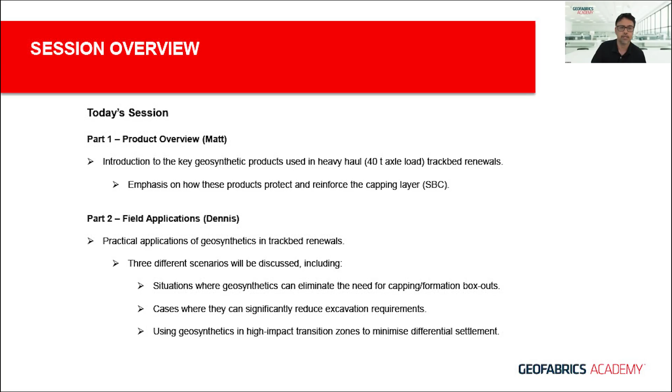I'm going to briefly go over the key geosynthetic products that we typically use in the trackbed in heavy haul rail, with an emphasis on how these products protect the subballast capping layer, which plays an important role in the overall trackbed performance. I'll go over the products individually, and then part two will be Dennis, who will talk more about field applications, going over three different scenarios that rail operators and consultant engineers may encounter: situations where geosynthetics can eliminate the need for capping or box outs altogether, cases where they can significantly reduce excavation requirements particularly over soft soils, and using geosynthetics in high impact transition zones such as bridge approaches, turnouts, and over culverts. So the first part is very much product focused, and then we're going to switch to actual applications and how they're applied in the field.

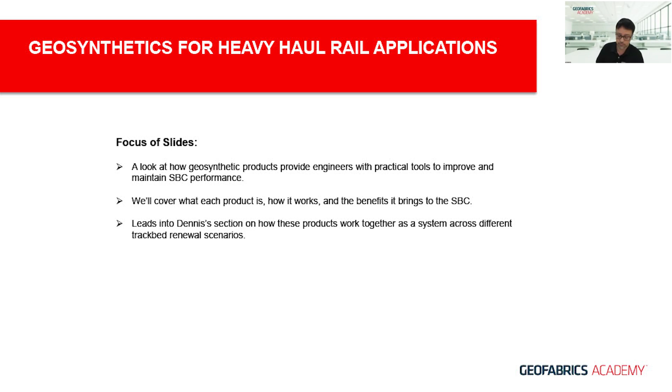As I mentioned, I'll be going over key products and their benefits, and I'll get started on that. The focus of my slides is to look at how geosynthetics provide engineers with practical tools to improve and maintain the subballast capping layer. We look at these individual products as tools in a toolkit, and we'll discuss their benefits, and later on where they can be applied in the trackbed. My section will lead into Dennis's section on how these products actually work together as more of a system, which we usually see them in the field.

So the four products I'm going to cover today are used in the trackbed: large aperture multi-axial geogrids, typically installed at the ballast and capping interface, which function for ballast stabilization. Then we'll talk about Tracktex, also installed at the ballast capping interface underneath the geogrid, which functions to provide capping protection and moisture control. Further down the trackbed, we'll consider OmniWeb, a type of geocell, used in the subballast capping layer itself for reinforcement. And underneath the geocell, we'll briefly discuss Mirafi H2Rx, used directly on the subgrade, providing additional reinforcement.

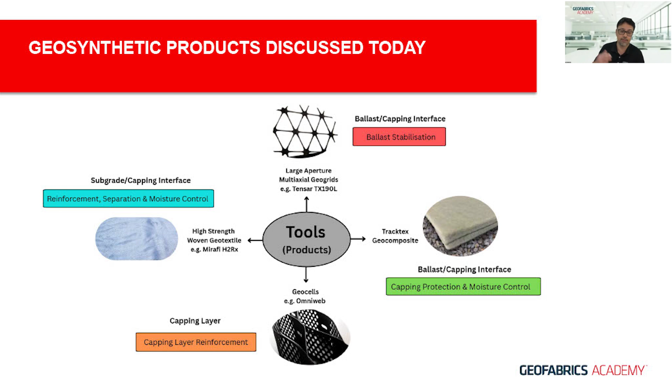So that gives you a good overall view of the products working as a system. I'll briefly go through each product individually. It's important to understand what the product looks like, how it works, and what benefit it brings to a capping layer. Some people have heard words like geogrids and geotextiles thrown around but don't always know what they actually look like. We'll cover that before Dennis goes into his section and talks more about the geotechnical parts of the products.

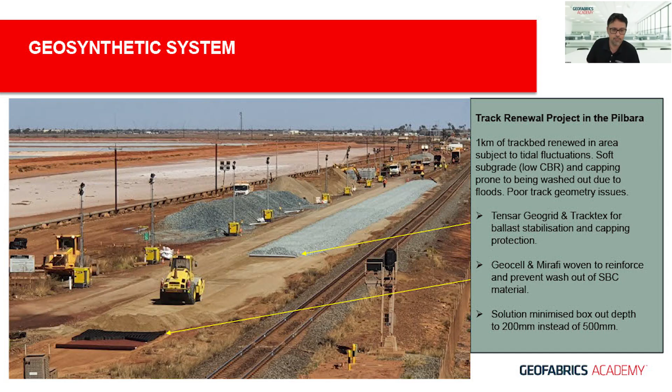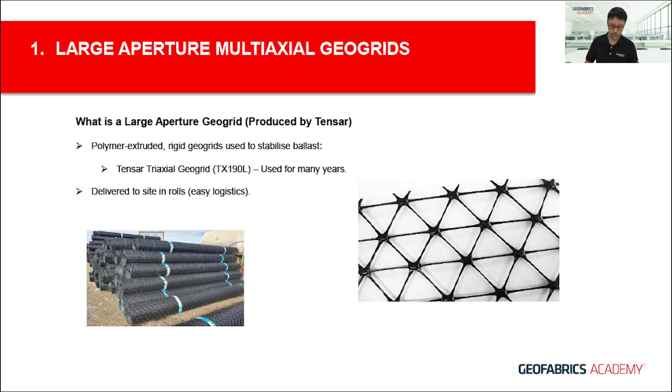So the first product, which is used to stabilize the ballast and goes directly under the ballast, is a large aperture geogrid. We've been supplying triaxial geogrids into the Pilbara for many years now with a lot of success. These are delivered to site in rolls, loaded onto a semi-trailer, taken up to site, stored somewhere, and ready to be deployed when the guys on site are ready.

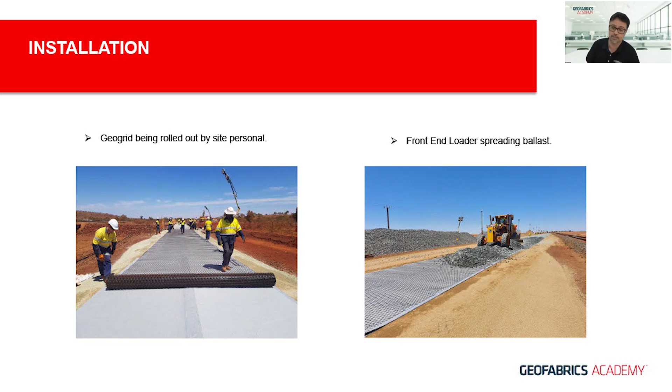Just a couple of photographs to demonstrate geogrid being laid out. Very quick, very easy, doesn't take long at all. After the geogrid's laid out, they come along with the ballast - typically a front end loader will spread that over the geogrid.

It's important to briefly understand how ballast stabilization works and how geogrids create it, because that will help us understand how they benefit the capping layer. We supply large aperture multi-axial geogrids, typically TX190L. The apertures are larger in size than other geogrids, and they better fit a ballast particle size, which is around the 60 mil diameter mark.

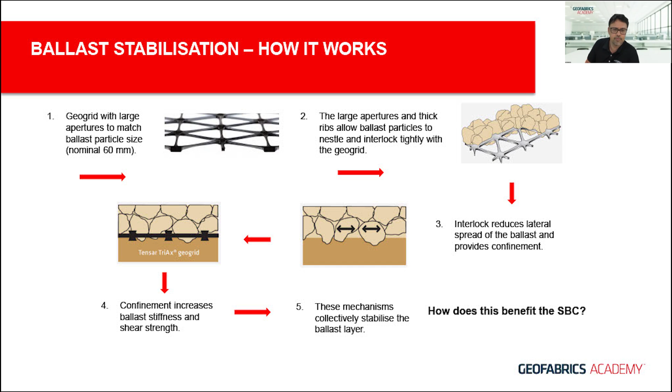So the large ballast particles nestle into the apertures and interlock with the geogrid. This interlock reduces lateral spread of the ballast particles and confines them in place. This confinement increases the ballast stiffness and its shear strength, and basically these mechanisms collectively stabilize the ballast layer.

So how does this fit in, and how does this benefit the subballast capping? It has two major benefits. The first is it protects and preserves the subballast capping, by spreading loads more evenly across it. This reduces the pressure and shear stresses on the subballast capping, minimizing wear and softening of the capping layer, and helps retain and sometimes even improve its performance.

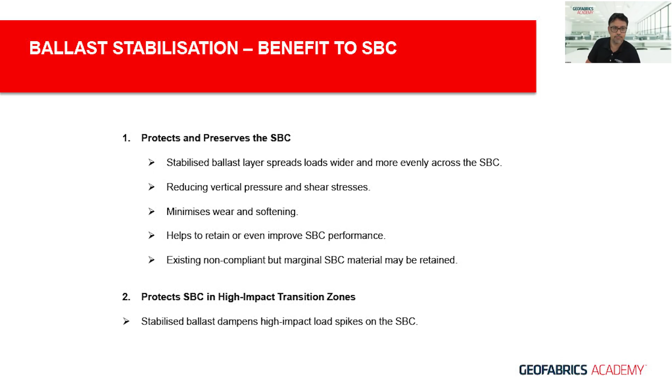Dennis will touch on this point a bit later - in some cases rail operators can use existing non-compliant but marginal subballast capping material, which can be retained rather than dug out and replaced. There are benefits in that aspect. It also protects the subballast capping in high impact zones, transition zones, where you typically get high loads with impact load spikes that can degrade the ballast and put extra stress on the subballast capping itself. So that's where ballast stabilisation fits in with benefiting the subballast capping layer.

So now on to Tracktex. Tracktex is a geocomposite product - basically a microporous filter sandwiched between two heavy grades of Bidim non-woven geotextile. It's installed directly under the ballast, and sometimes under the geogrid, and this helps protect the capping layer and also can help control moisture at the formation and capping level.

Again, these are delivered to site in rolls, so easy logistics, very similar to geogrids. They're easily installed, rolled out on site. They are actually heavier rolls - not that this makes much difference, but you might need to move them around with the prongs of a front end loader rather than the guys just carrying them over their shoulder.

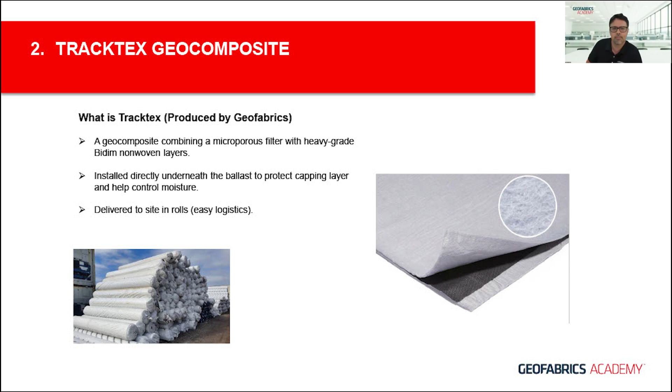But other than that, very easy to roll out. I think it's important to mention the actual physical characteristics of this product, because it lends itself to how it provides its benefits.

It has two very heavy Bidim geotextile layers, Bidim A74, with a combined grams per square meter of 1,300 grams per square meter. This acts as a thick cushion, effectively. Then we have the microporous filter in the middle, which can filter particles down to very fine particles, designed to retain even clay fines down to 5 microns.

It holds back a lot of the fine material found in the subgrade area. It's important to note that although the A74 itself does filter, it's better suited to coarser fines, typically fine sands, because the pore size of Bidim is quite a lot more than the microporous filter. So Bidim alone won't hold back clay fines. If there's subgrade mud pumping issues, rail operators in the past have tried using Bidim to solve that problem, but the clay still pumps through. So you really do need the microporous filter in those situations.

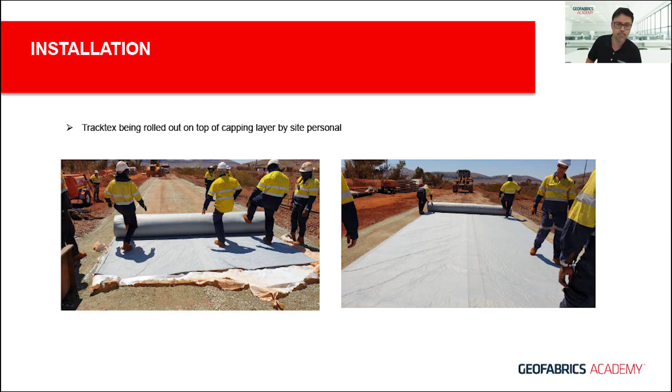So how does it work? Pretty simple, really. It's got the filter in between the two layers of geotextile. The filter, for all intents and purposes, is impermeable to rainfall. So under atmospheric conditions, just rain coming down, that won't infiltrate through Tracktex.

If you grade your formation and trackbed correctly, you can laterally drain water off the trackbed and formation. But importantly, it does allow the passage of liquid to go up and through under dynamic load. You don't want an impermeable layer that just traps water and moisture underneath in the formation subgrade with nowhere to go. So whilst it doesn't allow rainwater through from the top, it does allow any pore pressure and moisture to release through the microporous filter.

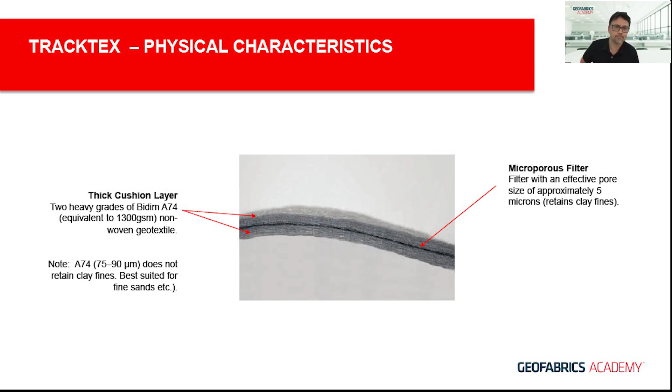So how does this benefit the subballast capping layer? Well, first and foremost, it keeps it dry, because rainwater can't get in from the top, and any trapped moisture can get out. This gives it a chance to dry out, and helps maintain its unsoaked material strength. Capping layer and subgrade formation materials often perform better when they're dry, as they're at their strongest, so it gives the formation a better chance to retain its unsoaked material properties.

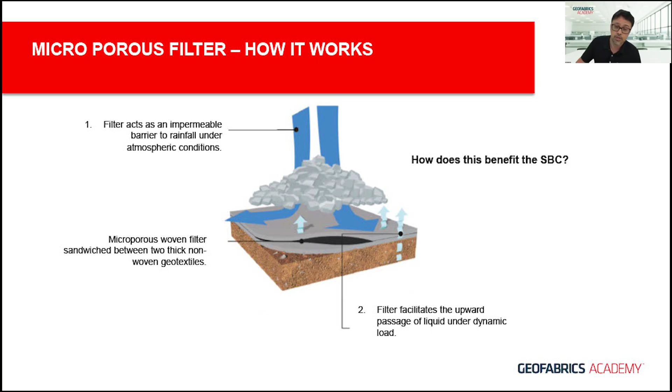The key message is that Tracktex helps control moisture above and below the subballast capping. And as I mentioned, the thick cushion layer provides a beneficial function as it minimises any grinding of the capping layer from the ballast itself. It prevents fines being generated in the capping, which can cause it to lose mechanical properties and strength if it gets ground away. With fine generation, any moisture and rainfall can potentially turn that into a muddy slurry, which you don't want. So it actually helps prevent any damage to the capping layer itself.

Onto the OmniWeb. The first two products were installed on top of the capping under the ballast, whereas OmniWeb is used to reinforce the subballast capping itself — it actually forms part of that layer. OmniWeb is a type of geocell, and its job is to fully confine, reinforce, and stiffen the capping layer itself.

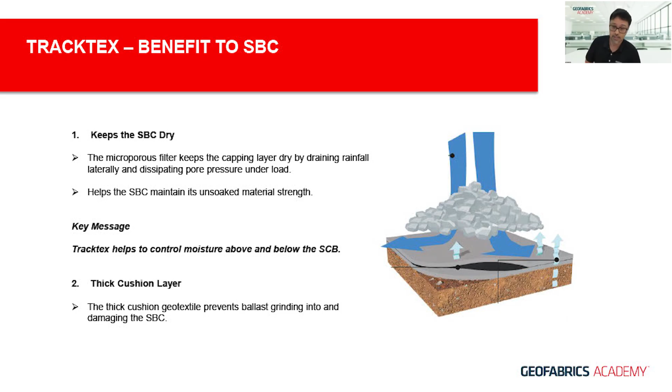It actually comes in panels, and these panels are expanded on site to the width of the box out or excavation, and the subballast capping is then brought in, tipped into the cells, and spread and compacted. These are delivered to site on pallets, so a little bit different — they don't come in rolls like Tracktex and TX190L. They come in pallets, but again, they're very efficient to get up to site and store and move around, so no problems there. Just a couple of quick photographs.

So here's a GeoWeb installation. Just a quick note: we previously used a product called GeoWeb, but we now use OmniWeb — it's the same product, other than OmniWeb being wider. It's gone from 2.5 meter wide to 5 meter wide panel widths, which better suits typical box out widths that are around 4 to 5 meters wide.

So you don't actually need to connect the GeoWeb in the middle anymore with the OmniWeb product. Typically,

the cell depth is 150 mil, and the capping will be poured in, and then you'll have an overburden amount of material of about 50 mil. So your box out is around the 200 mil thick mark and about 4 or 5 meters wide. And as I said, it's just the capping material is tipped inside.

The limiting factor, so OmniWeb is extremely quick to install. You expand the panels widthways and lengthways, and then you join them with the Atra keys end to end. That really doesn't take very long.

The limiting factor for installation is how quickly they can pour the capping material itself. But generally, it isn't really much any slower than if they were just putting down capping alone. It might be a little bit slower, but not much really.

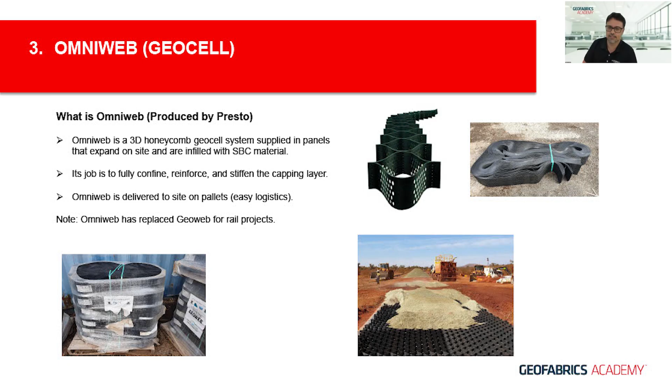And then you're going to compact it in the same way you would do with just a normal subballast capping. Again, I just want to explain how it works, so you understand how it will benefit the capping layer.

Vertical loads are transferred into the geocell, where the confined infill attempts to spread laterally. But the cell walls themselves prevent this movement of the capping moving outwards through frictional resistance between the infill and the cell itself. So there's friction here along the depth of the cell.

Hoop stresses are created when the load comes down, which prevents expansion of the cells, and there's a passive resistance from the neighbouring cells as well. So these all work as part of a unified system in confining each individual cell, the material in each individual cell, and you'll get an overall stiffer, stronger layer, basically.

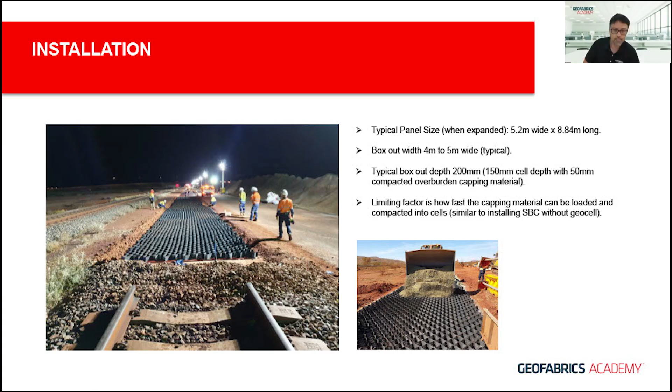So pretty much what I'm saying here, together they confine and stiffen and reinforce the layer, this layer here.

So what benefits does this provide? This will actually provide benefits not just with the subballast capping layer, but also the ballast itself and the subgrade underneath. Cellular confinement will create a semi-rigid slab effect, which will provide a uniform platform for the ballast to lay on,

a strong uniform platform for the ballast to stay on. It spreads the loads wider and shallower, so it's quite a good image here.

Without the GeoWeb, you're probably going to see a bulb that goes a lot deeper and narrower, so you're going to have a lot more stress, particularly at this point on the subgrade itself, but the GeoWeb will spread that over a wider load and shallower.

So this allows GeoWeb and subballast cappings to be installed directly on weak and soft subgrades, and a major benefit which we're seeing all the time is in that case we can have reduced box out depths.

So rather than over a soft subgrade, rather than going down 500 millimeters without reinforcement, we can save 300 mil and go to 200 mil, and there's many benefits.

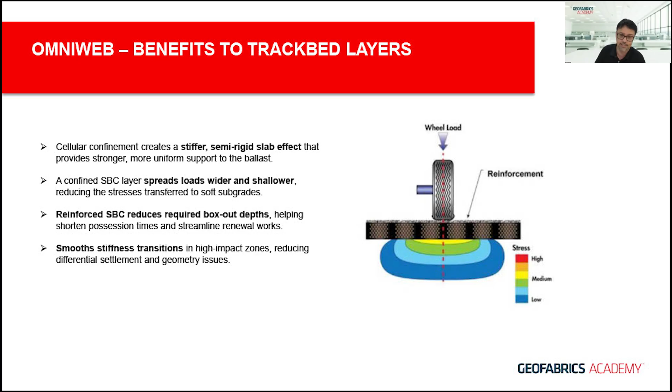Dennis will touch on this in his section a bit later, and this smooths and stiffens transitions at high impact zones as well. So again, Dennis will touch on that in his section.

So the last product I just want to briefly talk about is Mirafi H2RX, which is a high modulus, very stiff, moisture managing reinforcement woven geotextile.

And in the context of what we're discussing, trackbed reinforcement and renewals, it's a product that comes in hand with the OmniWeb GSL, and they actually work together really well.

We'll just make a mention that previously we've been using a very similar product called RS380i, but now we've moved on to H2RX.

They're both products by Solmax, but the H2RX product is basically the same as the RS380i, but it has a moisture managing function with it as well. So there is an additional benefit for this product.

Delivered to site in rolls like Tracktex and the TX190L GeoGrid.

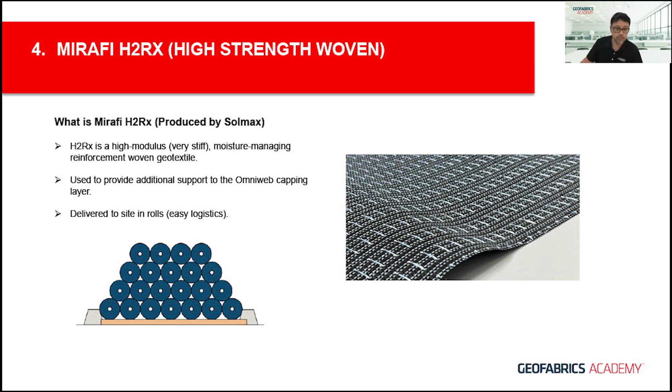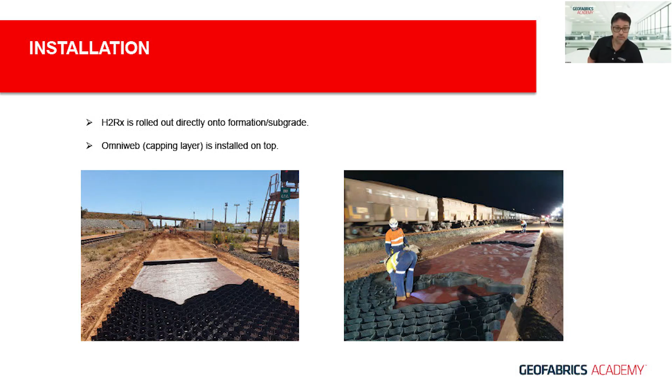And you can see here it's installed directly under the geocell on top of the subgrade. So it's very, very quick and easy. It's similar to Tracktex and the GeoGrid.

So how does it work? It provides three functions. They're all pretty important, but to start with, it provides reinforcement, and it does help to increase the stiffness of the GSL reinforced subballast capping.

So although the GSL will increase stiffness, it will be improved by using the high tensile strength Mirafi H2RX product underneath with high strength but low strain, and that will help minimize any deformation at the subgrade capping layer interface

even more than just the GSL alone. And it also, another maybe underrated function, is the separation function.

So it ensures that the subgrade fines or material doesn't ever intermix with your subballast capping infill that's in the geocell itself. You're literally going to be keeping those two materials, subgrade and capping, separate. There's no way they're going to mix, or over time have the infill of the geocell making its way into the subgrade or vice versa. So those are the two major functions.

And with the H2RX, this actually has a moisture management function, which I believe is going to play a key role in keeping the formation and capping layer dry, alongside the Tracktex. It's basically designed to wick water from the subgrade. It can also wick it down from any moisture above, and wick it towards the product and through capillary action, and that is then moved sideways to the sides of the product through this wicking mechanism.

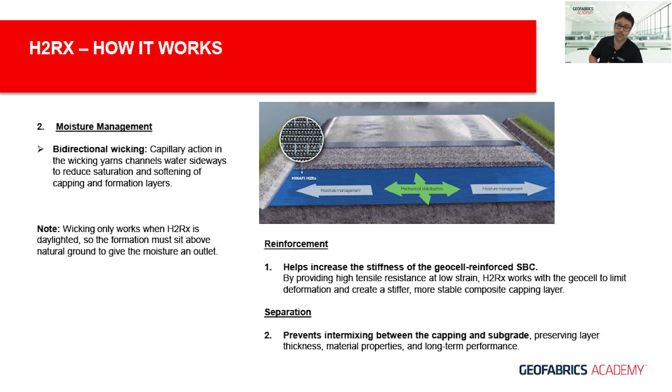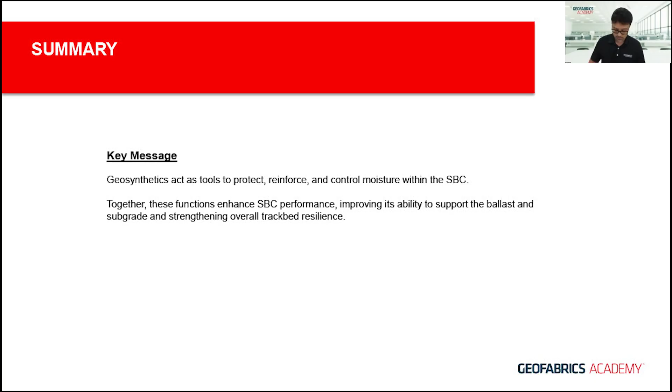So just to summarise, before I pass you over to Dennis, a key message I want to get across is geosynthetics act as tools to protect, reinforce and control moisture within the subballast capping. Together, these functions enhance the capping performance, improve its ability to support the ballast and subgrade, and basically strengthen the overall trackbed resilience. So I'm going to pass you over to Dennis now.

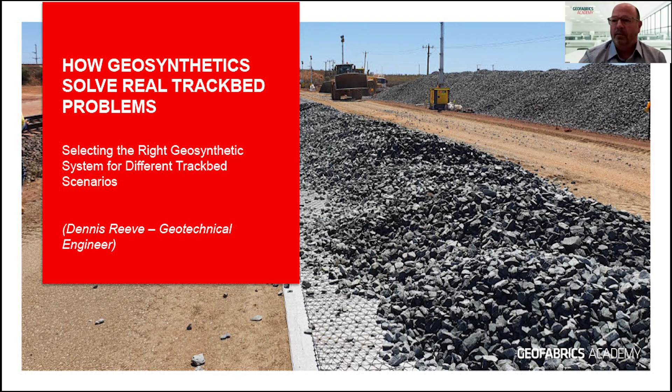So the typical problems that we have with marginal formations: non-conforming subballast capping or subgrade, potentially no capping layer in some cases, weak, soft subgrade, clays, over east it might be the black cotton soils, or in the Pilbara, your Gilgai formations, obviously quite a range of those. Localized bog holes, mud pumping, fouled ballast, and all that sort of stuff.

So what are the operational impacts of that? It basically leads to speed restrictions and downtime, frequent maintenance work, and overall loss of revenue for asset owners, which is the key thing that we're trying to avoid.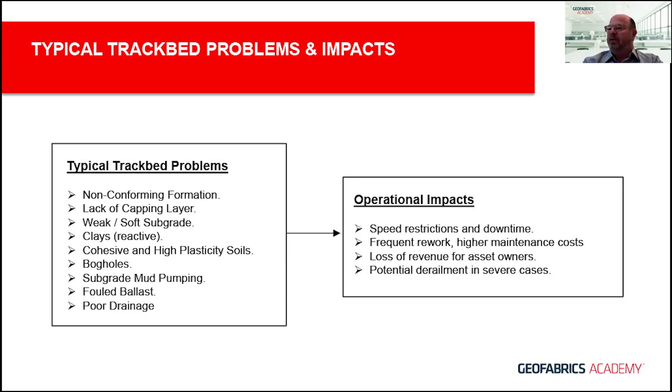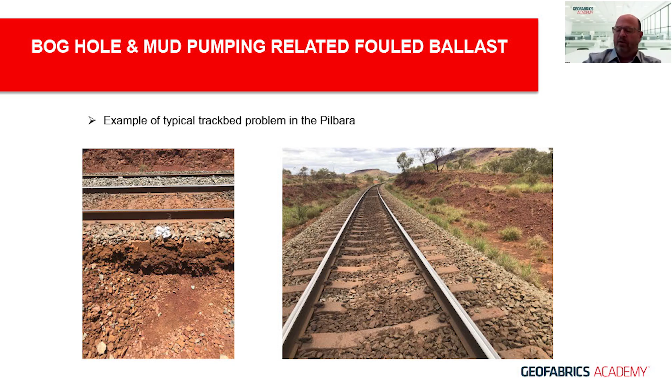So basically what the traditional method to fix that is: dig out the weak and crappy material and backfill it with good material. And we looked at these situations, and we thought, well, how can we reduce the volume of excavation and downtime, and enable just a quicker formation replacement.

The overall idea of our work is to look at what are the geomechanical behaviors of the subgrade and subballast capping, and how do we rectify those effects with the geosynthetics.

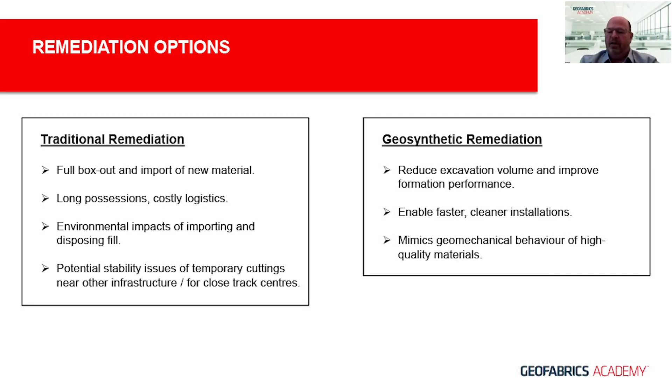As the design process, we identify where there's poor track performance, do some investigations, and those investigations define what are the marginal or poor characteristics of the formation. We then design applications to address those performances. It's important to note we don't need the perfect solution, and we need to accommodate variable ground conditions, since there's variability along the track.

After we've collected all the data and done testing and analysis, we look at what design tools we've got. We look at the bearing pressure for weaker soils, Kentrack and Plaxis or other finite element analysis programs to see how the stress is being applied and what effect that has on the service life of the operation, compared to a traditional solution of digging it out and backfilling with compliant materials.

In doing that analysis and defining our parameters, we look at research that's been done, down to individual tests or published papers and published information from manufacturers. We also looked at full scale trials done in the States, particularly for softer clays, and then that led into how it's performed when applied in Australia. Over the last 6 or 7 years we've seen a very good correlation between what we're expecting and what's actually occurred.

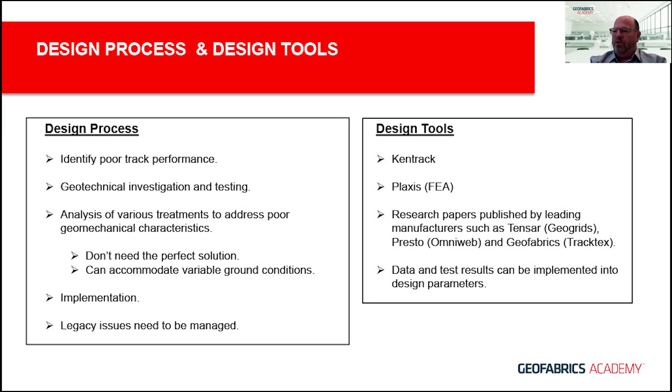Here's some examples of the different treatments supporting what Matt showed previously. So this one here would be a bridge, with the cross girders, metal cross girders, and ballast. We've cleaned it out, then put this geocell solution in here, backfilling it, which provides a stiffness transition from your very stiff bridge to a relatively moderate stiffness, and then lower stiffness beyond the geogrid solution.

This is a solution where we haven't dug out the poor material. We've just installed the Tracktex and geogrid on top of the formation, which is a marginal formation.

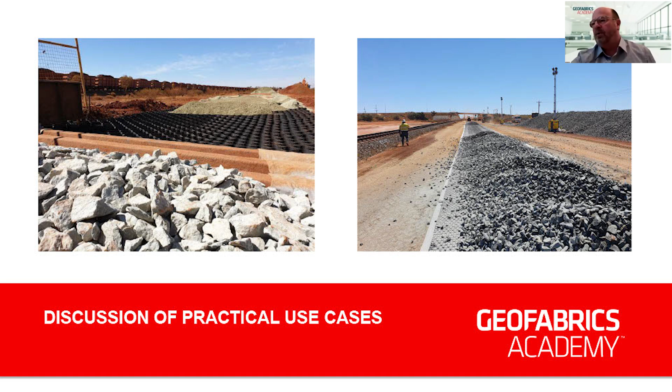So we're looking at 3 cases, and the first case is basically where we want to eliminate excavation. That's the solution where you've got marginal subballast, capping and subgrade, and it might have marginally weak or marginal high plasticity, or similar situations. In that case, we're looking at installing the Tracktex directly on top of the subballast capping, and then the geogrid.

Each item will depend on what the characteristics of the formation are that we've defined in the investigation. If we've got weaker subballast, capping and subgrade, the Tracktex provides the water management so that it doesn't go to the soaked condition in a traditional sense, so we can assume unsoaked or partially soaked conditions during the design process.

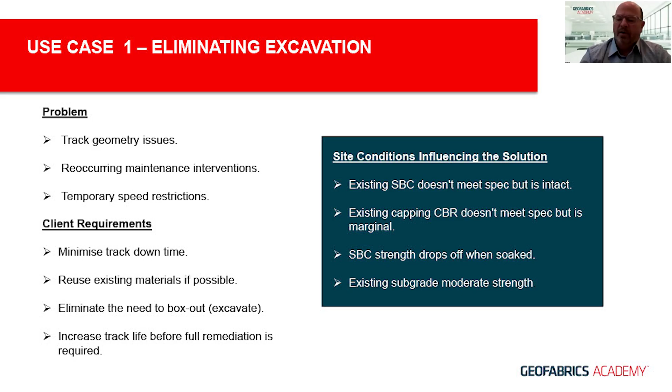This cross section here is a good example of what we're doing. Traditionally you've got your subgrade and your capping layer, which may or may not be the same as your subgrade. What we do is look at the Tracktex going on the bottom, directly on top of the capping once you've reformed the geometry, so that any water that falls on it goes to the side and off the track, with the geogrid on top. That basically allows for where you've got the marginal conditions.

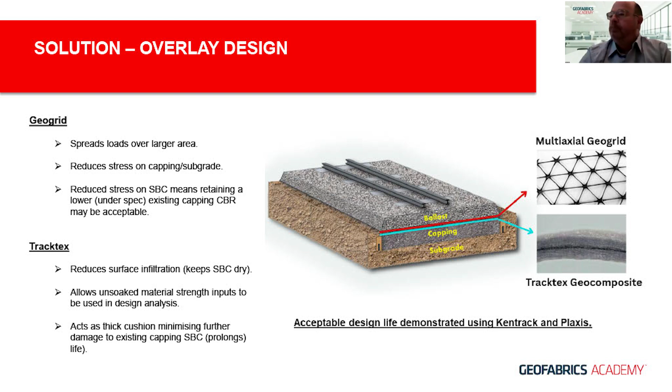Here's an example of that, where it's just directly placed on top. This sort of solution has successfully been applied in heavy haul rail applications over 100 kilometers of track, over a number of years, with several hundred million gross tons per annum. So it's a pretty good record for that process.

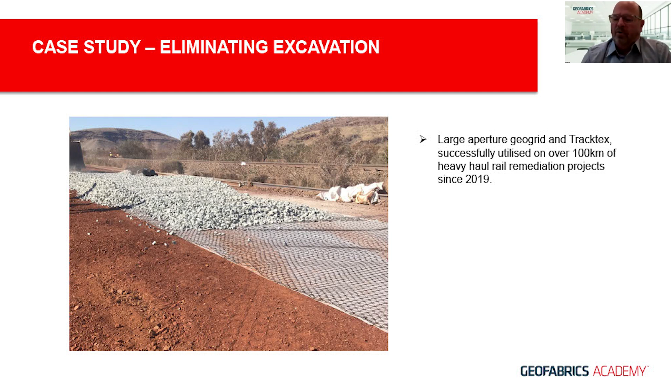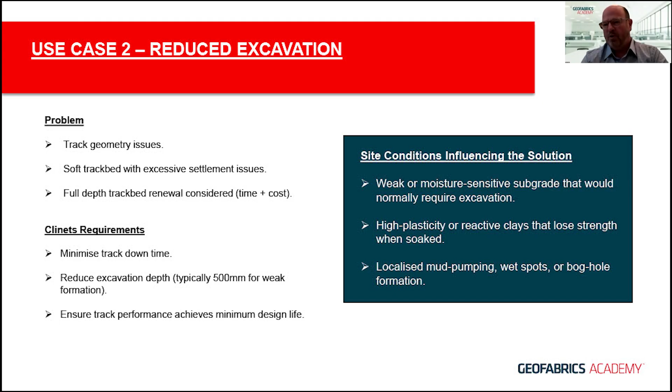The next case we look at is reduced excavation. This is where you've got formation that's worse than marginal — it's actually very soft or soft, and you might have reactive clays there, or moisture sensitive material, bog holes, mud pumping, wet spots, that sort of thing. Traditionally you'd dig out the subballast capping and possibly some of the subgrade, and then backfill it with conforming materials.

So this treatment looks to use the geocell on the base. The solution: we dig out the 200 mils or so, install the Mirafi on the bottom to prevent the fines migrating up into the subballast capping and to distribute the loads a bit further. The geocell goes in, as Matt said, to distribute loads over a much greater area.

So this is a good solution for where you've got weaker soils, your subgrade particularly, and you might be concerned that if you dig out and just replace the subballast capping, it might end up just deforming and degrading into the low strength subgrade when it gets wet.

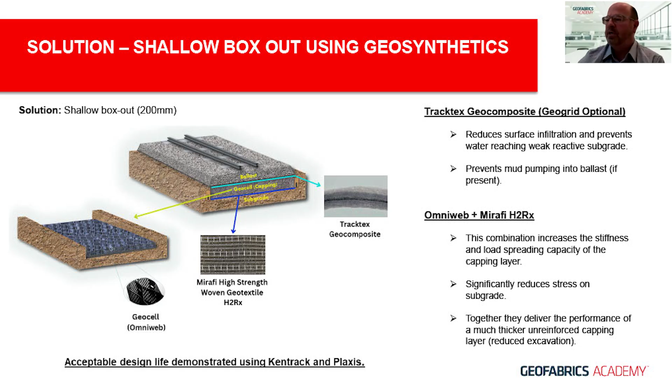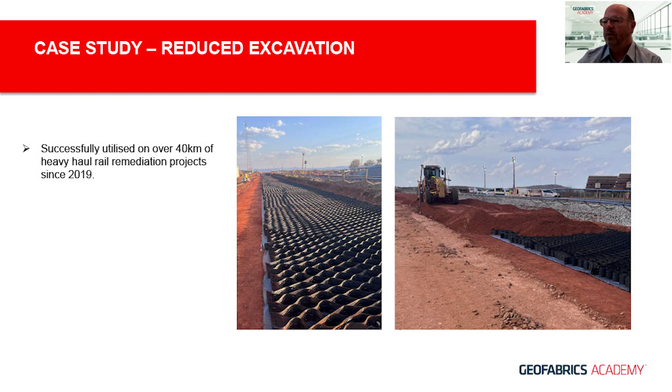Here's an example of that solution being applied at a turnout. So you can see, dug out a little bit, install the Mirafi, and then install your Omniweb, backfill it with your compliant subballast capping.

The third case is similar to the previous case, but where you've got high dynamic loads or high changes in stiffness across a structure. It's very similar in terms of the geosynthetics used, but we add in there the geogrid, the TX190L, so that it's just adding that extra bit of transition over the stiffer structure.

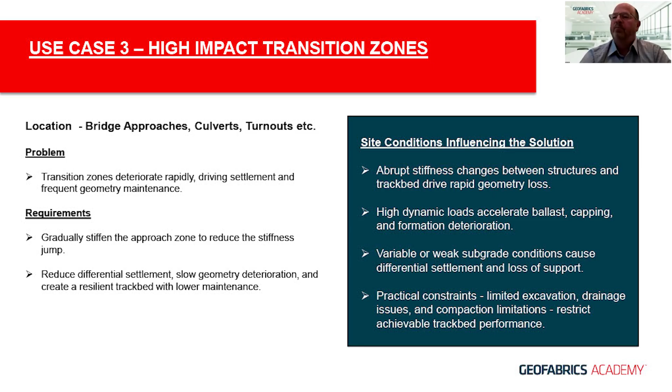So in this case it's exactly the same as the previous one, but you've got the geogrid on top. The key here is trying to provide a stiffness transition, particularly over, say, a bridge or other structure, where you've got very high stiffness on the bridge, and then trying to make it moderate over a short zone, 20 to 25 meters beyond the bridge, and then onto the formation embankment.

And this treatment's worked very well as well. It's been applied in Australia, and it's a go-to system for a couple of the railways. When they're doing their renewals on bridges, they apply it as a standard.

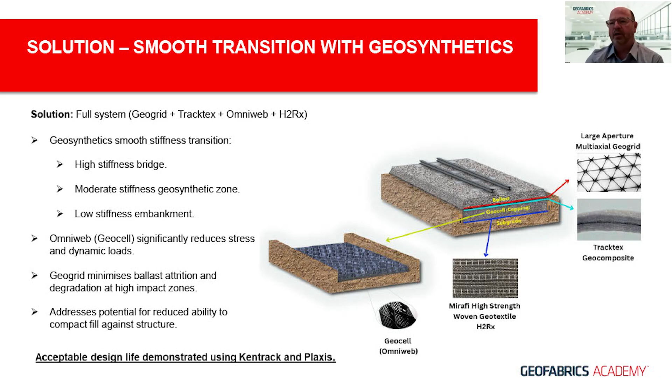So here's an example of that on the bridge. This is the case before it's in there, and all rail's been taken off. This is showing how it extends up to and abuts against the bridge, and then the ballast gets backfilled in here and so forth. So the key thing here is it stops that traditional dip you get at a bridge interface.

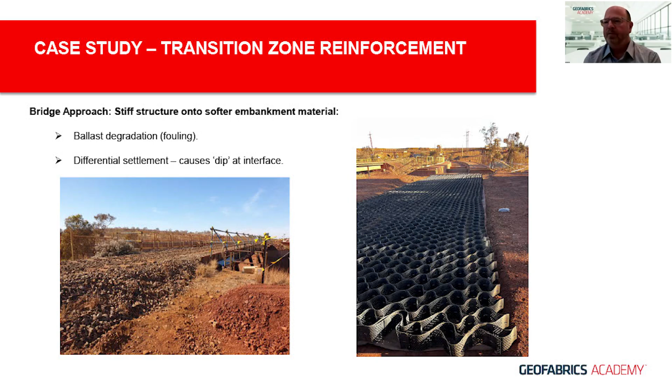As I was saying, it's been applied in numerous rail bridges, and successfully. Here's some more examples of that being applied. I guess this one shows the full case of it - the geocell backfill, compact it, trim it to the grade, and then install your Tracktex and then your TX190L.

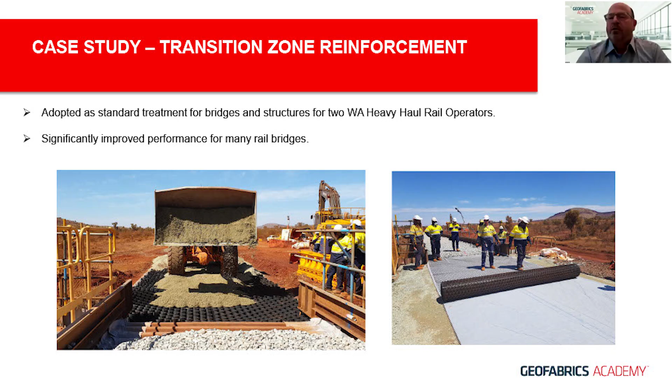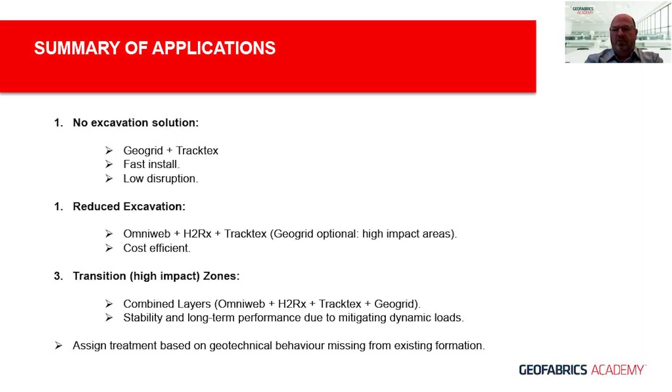That's the end of what I was going to talk about. But if anyone's got any questions, we'll go through those now.